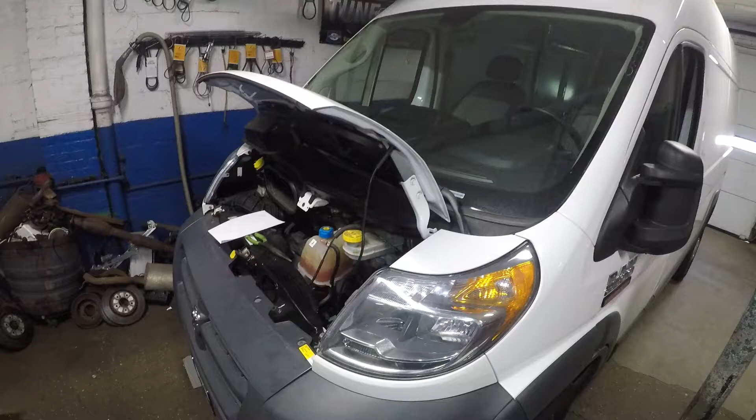What's up, YouTube? I got a 2018 Ram 2500 Promaster. Today we have a problem.

As you can see, I got my key on and no horn.

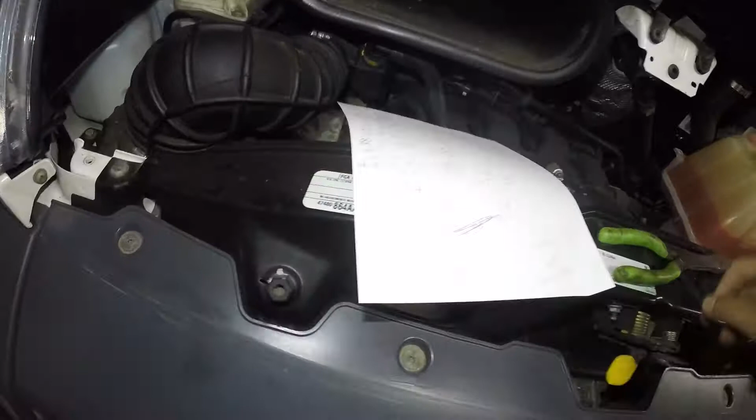So if you guys want to do a little bit of diagnostic, checking your fuse and relay, I am gonna show you. I cannot test the fuses because they close up the ports. I did do a video on the USB and charging port fuse, and those fuses were bad. I do have a video on that, and I have a diagram on a whole bunch of stuff if you need to know which fuse is what.

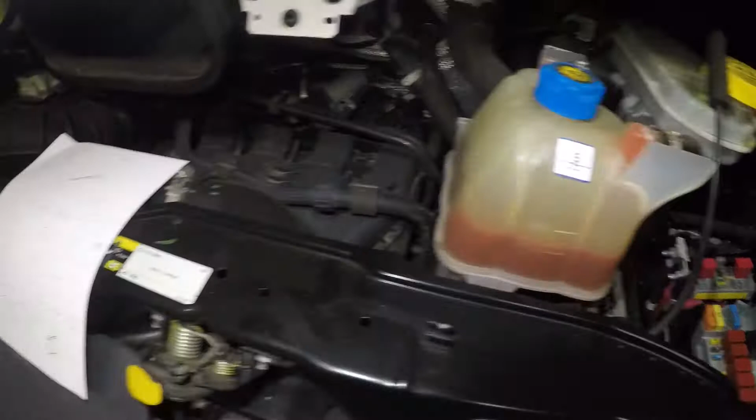Check out my other videos. But you see this right here, this is your horn relay, the one in the middle. There's 5 relays that look the same. Come on, so it's this one right here.

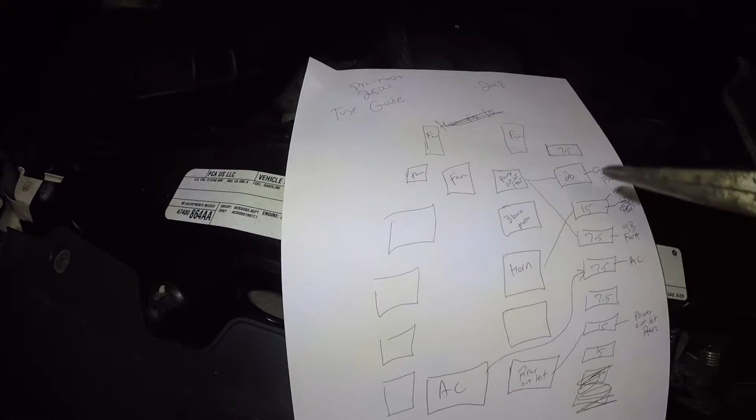So what you're gonna do is take this relay out of there. All you do is grab it with needle nose pliers and it should come out, then you can swap it with another one. These are tough little guys, so let's try a little bit harder. I'm not gonna be able to do it with one hand, but you can swap it with this.

This is the AC relay. You can also swap it with this one right here, this is a power outlet relay. So maybe your AC relay is bad as well.

So swap it, try different ones. You could use this one, this is for a power outlet, but you will be shutting down your power outlet. But the horn fuse, very important.

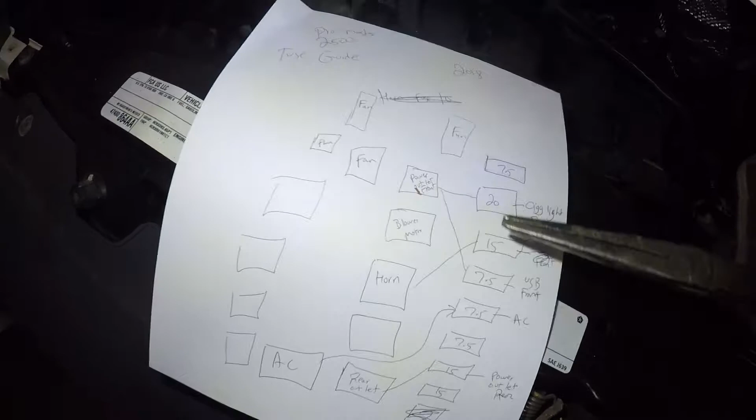1, 2, 3. You see how I connected a line here to here? So it's a 20 amp fuse. The horn fuse is this 15 amp right here.

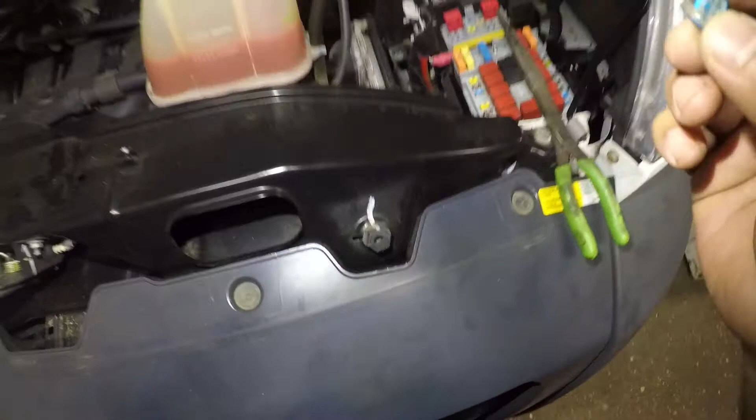Since you can't test it, what you're gonna do is just pull it out and put another fuse in. This car is terrible with the fuses, they just don't want to come out. But this one looks pretty good, the fuse looks good, so I'm not gonna change it.

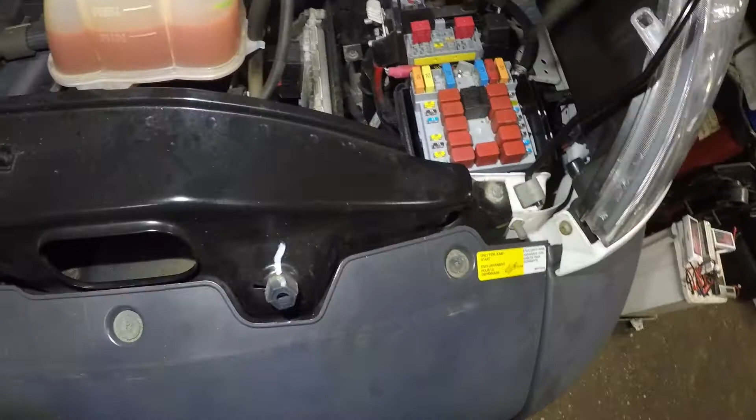It might be blown, it could be the horn itself, it could be a ground, it could be the switch in your steering system, it could be a relay. So try these few things, so now at least you know where the fuse is and where the relay is.

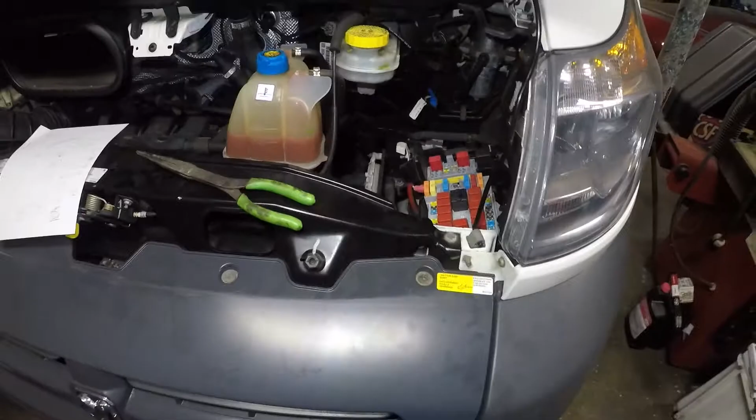But if I discover something else with this car, because I am going to go further, I'm probably going to go deep into the relay, and I'm probably going to hotwire the horn and let's see if it works. Then we'll put a test light here in one of the circuits, see if the signal comes from there to the computer and it gets here. And do check the rest of your fuses and relays just in case.

All right, so the horn doesn't work on this one. This is part 2. I showed you fuses earlier in my videos. This is a 2018 Promaster Ram 2500. So we have an issue, no horn whatsoever.

So here's the relay for the horn right here. This is the horn relay, and let's look at our diagram in the back. This third fuse, 15 amp, this blue one right there, this blue one right here is for the horn. So this and this work together. Let me show you what I discovered so far.

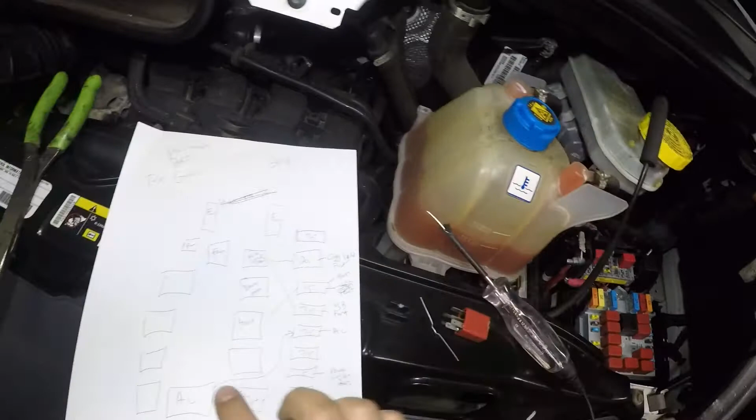So let's pull out this relay. Let's go into our diagram mode here. You see the number 30 right there? My lighting is just crazy bright. So this is the relay.

So pretty much when you press your horn, this thing gives a signal, teen, teen, teen. It goes through some type of module, and then it engages a ground into this relay, because we have a 15 amp fuse, number 10 fuse right there, F10, that's a 15 amp fuse. So that's what we're looking at.

So the fuse comes down, bam, there's power over here, but this relay needs to engage, and this power should be sitting over here. So what I discovered so far was there's a number 30 leg here.

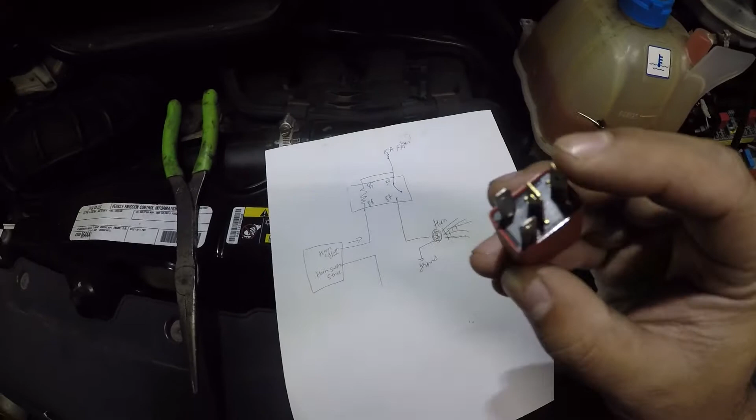This is the one right there. If you look at it, that's the leg that goes right there on the fuse itself, that's that one right there. Let me get my lighting a little bit better on this side. So that's the leg, check this out.

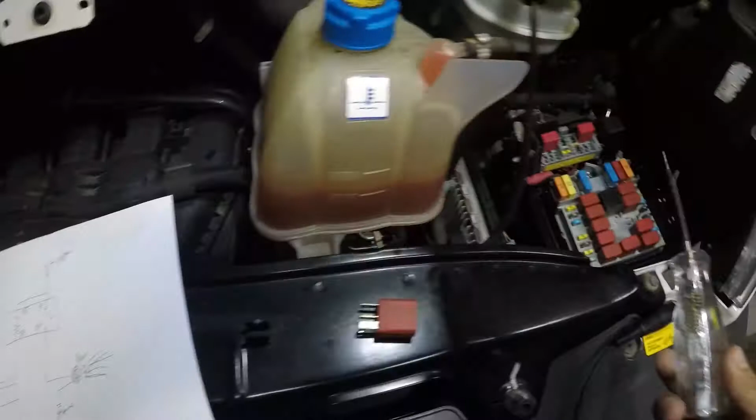I ground this, there should be power sitting over here. There should be power, and we have power. What I did was, let's take this off and let's pull out this fuse just to confirm it. Because this vehicle is crazy on fuses, there's nothing like pretty much actual. You can't even check these fuses because they don't have that tip to check.

But anyways, let's put this back. And then now we don't have power, but if I put this fuse back in, we have power.

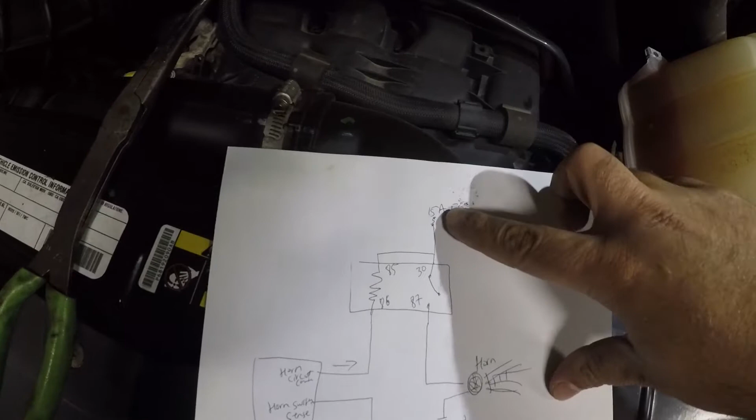All right, so this circuit from here to here is good, but now we need to check 85. Let's see if 85 should have live power right there. 85 is this leg right here. If you look at the relay in that manner, the 85 leg is that one right there, so it'd be the one over here.

Let me show you where I put this guy at, so make sure you get a good view of this. I'm using a pin here, a cotter pin. And we have no power in 85, so there's no power here.

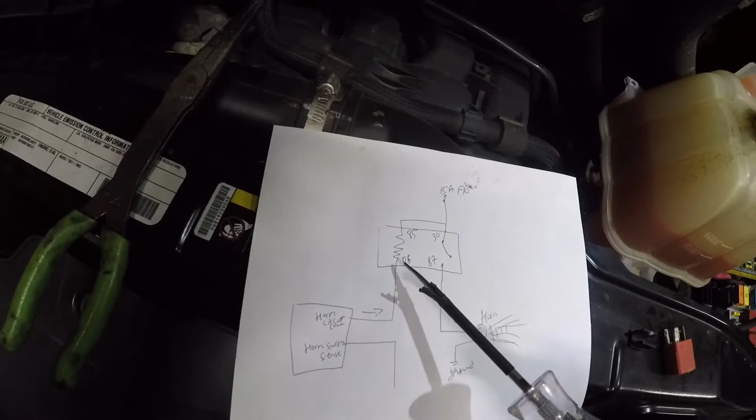But what we're gonna do is, I'm waiting for one of my friends, so once he comes over here, we're gonna check 86. We'll put a test light on it, but we need to invert ground and power because this is ground controlled since we needed power there. And we're gonna check one more thing.

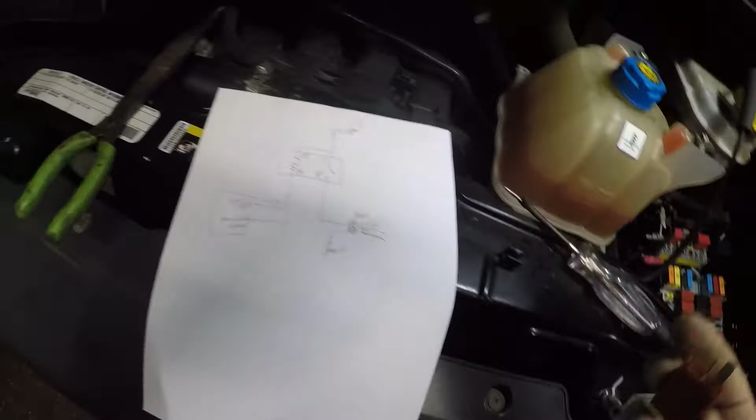87 should have ground because it's gonna backfeed right through the horn. It should backfeed. So let's look for 86. If it backfeeds 86, that means I can jump it and see if the horn just goes meh. So right now we're checking for ground, so we're gonna switch to positive here.

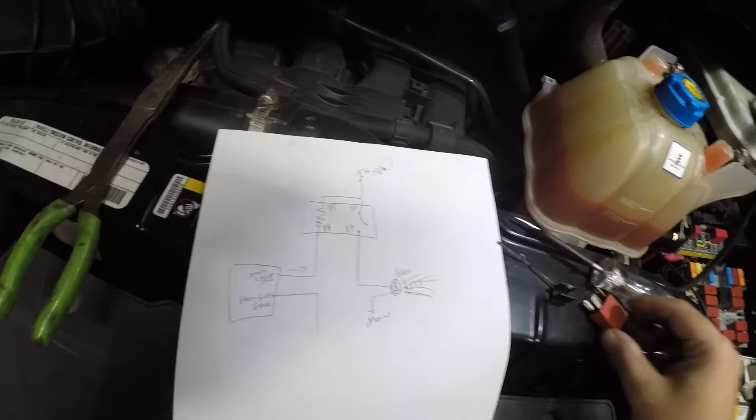Okay, I might be wrong there, but alright, so there's nothing there. Maybe it's not gonna backfeed, or maybe my test light's not connected properly. But 86, let me just make sure I got it.

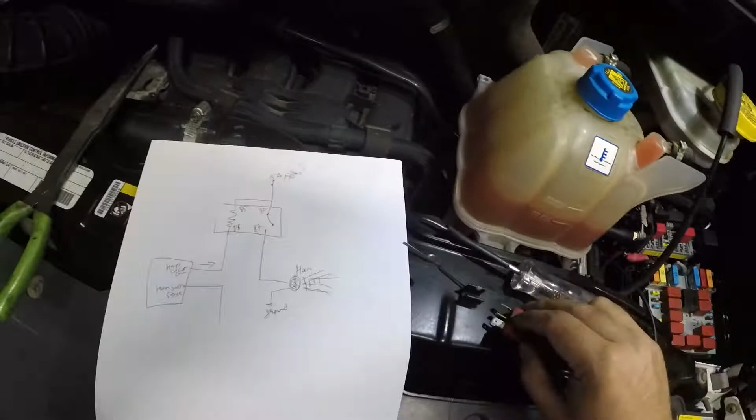I'm sorry, 85. 85 is correct. I don't know if I checked the right one. 85 is the one more closer this way. Let's do it again. I hope I checked the correct one. 85. Oh, it does have a very tiny bit. See that?

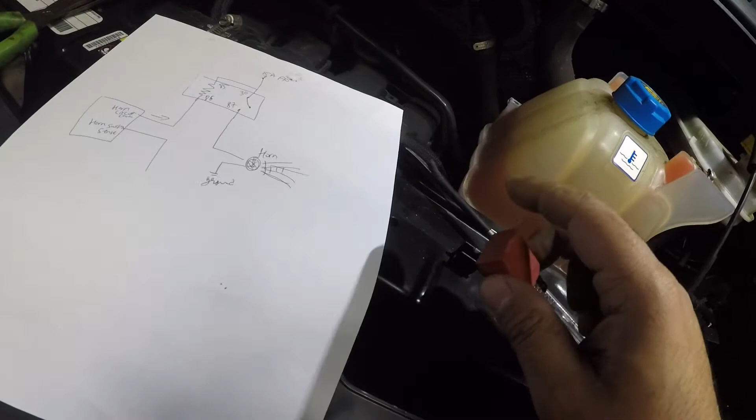Okay, so if I take a wire and jump it from here to there, it should go boom. All right guys, I was wrong there. I'm sorry, 85 should be a power. What was I checking there? 86. 86 is the ground cable.

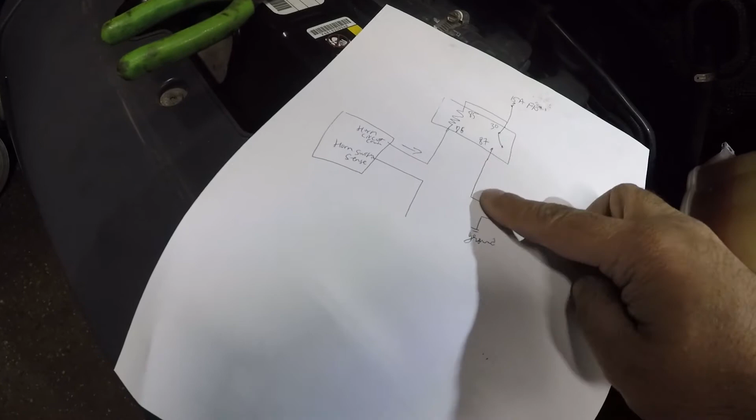So far all I discovered was there was no power here at the 85. And so what I did was I made a mistake. So 87 is the cable that goes to the horn. Let me look at what's in the 87. 87 is this middle leg right here.

So you see I put the pin already in the middle leg right there, and I got me a power. So all this lead is connected to power there. Check this out. There you go. So we figured out, so pretty much our circuit is pretty good.

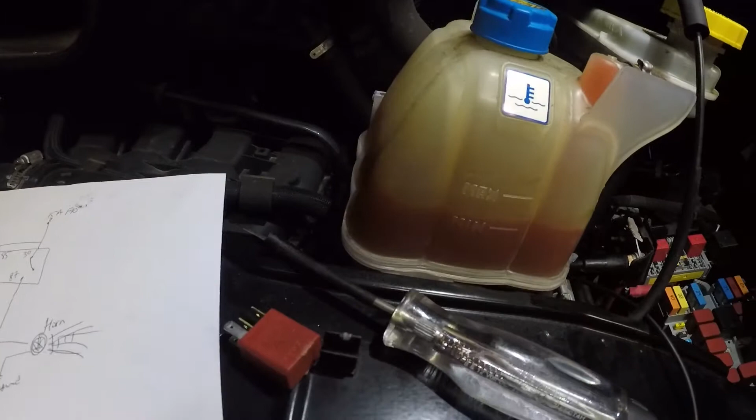Only thing I can't check is, you know what, let's check this 86 because my friend is not here. I'll connect my phone to the camera, and what I'm gonna do is 86. Let's figure out 86 that way, because I need somebody to press the horn while this is going on. But 87, I'm sorry, 86. You can easily mistake things here.

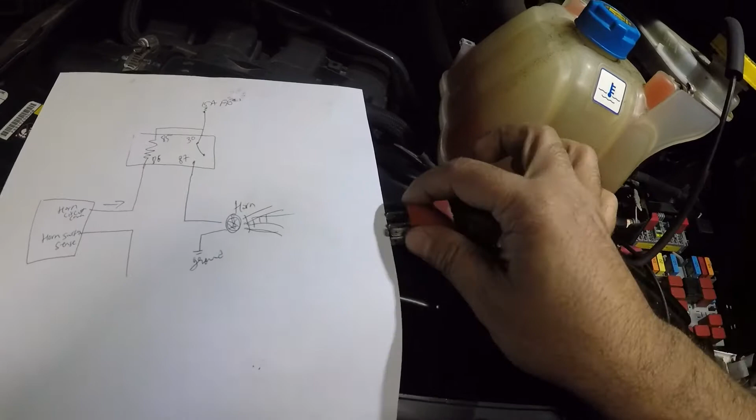86. Okay, at 85, I should have power. Let's check one more time. 85 is this, it's hard to see on this guy. 85 is this leg right here, and that's the one right here. So 85, if I put it that way, it'd be this one.

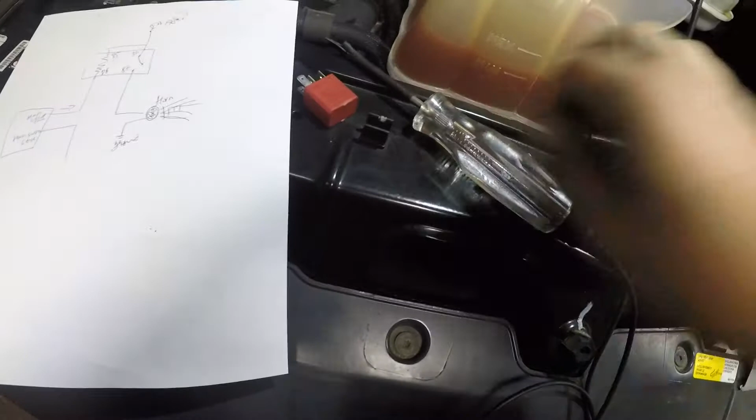Let's just check power one more time. There should be power here all times. All right, so let's switch up this little guy to ground here. Okay, so yeah, definitely we don't have power there. We don't have power there.

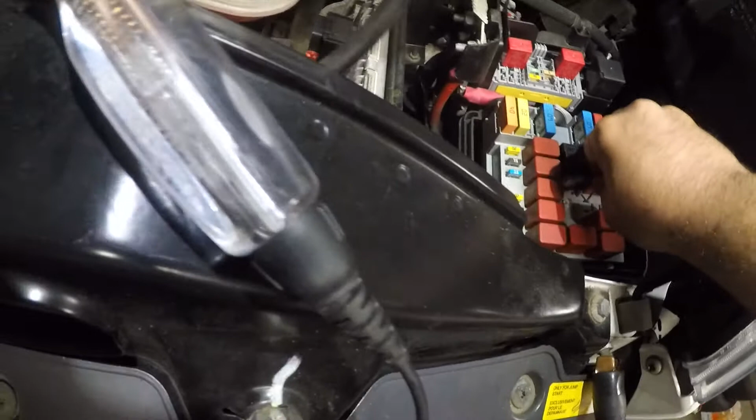But let's check the control, 86. 86 is the opposite one right there. So that's 86, so this is where the signal from the horn comes in. So if this doesn't give me signal, we have a problem with something else.

So what I'm gonna do is I'm gonna try to figure out how I'm gonna put this test light here, and I'll put my camera here, and I'll go inside with my phone and press the horn.

All right guys, so what I did was I put my test light here, and I tried to check if there was a control coming from the horn switch. So we have multiple problems here. First of all, we don't have power in one of the leads on the relay that's gonna give power to the relay. We do have power that's gonna go directly to the horn, but also we don't have a control. So most likely it's gonna need further diagnostic, but we do need to inform the customer.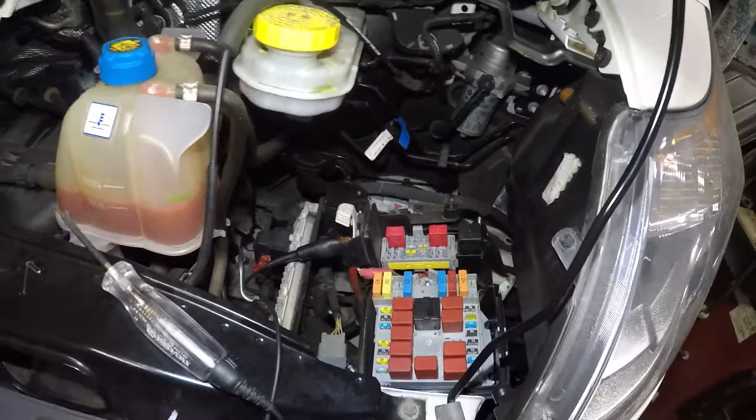Maybe they don't want to go further because we don't want to go bananas checking, because the little guy goes through the body module, the little thing I showed you guys here. Let me pick up my circuit here. So it does go through a body module here.

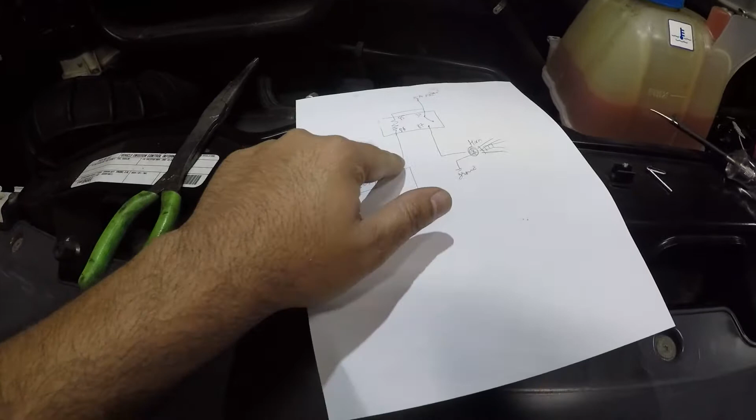Let me put my light up here. This is the body module, so when you press the horn, it goes through the body module. You can check here to see if your switch is good, because when you press the steering horn, if this thing gives out a ground, good, that means your switch is good. Then this needs to have an output, and it could be a broken cable, it could be anything, it could be a bad circuit inside this fuse box itself.

But long story short, we're gonna have to continue this. If the customer agrees, we'll go further and update the customer. Anyways, all right guys, it's a Monday morning.

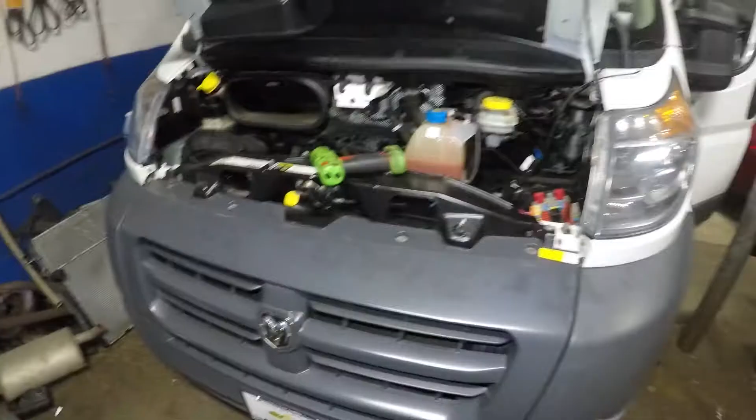This is a friend of mine's 2018 Ram 2500. So as you see how I was working on the horn relay, we jumped the wire to go directly to make the horn come on. And I got my test light connected here. There's a reason why I did that. I'm gonna show you exactly what I did. I got the horn working, but really there was no problem.

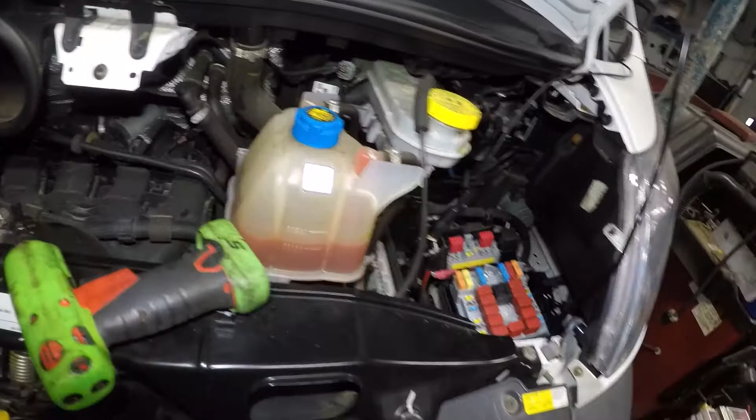I'm sorry, anyways there was really no problem here. The problem was a bad mechanic that worked on this vehicle. So pretty much it cost him an arm and a leg already, and I'm gonna use this little guy on a process that I'm about to show you inside.

So this is the thing I was gonna go check. Customer said he doesn't want to replace a module. If it's a module, he doesn't want to replace a clock spring. If it's a clock spring, this does go through the clock spring, the control of the horn. There's a clock spring, I'm gonna show you where the clock spring is.

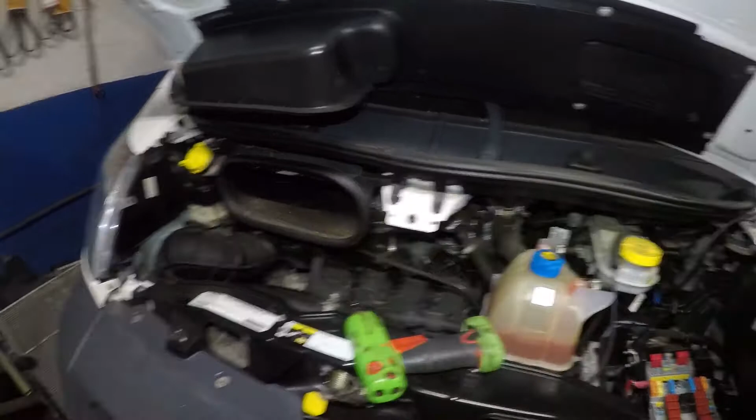But it could have been the body module, because remember the circuit goes through the body module and it controls the ground from there. So the horn switch shoots through the circuit to the body module, straight to the relay. It grounds the relay, and there's a power wire waiting there that becomes magnetized, and the relay clicks, and bam, that's what it does when we jump there. It gives the power to that cable for the horn to come on.

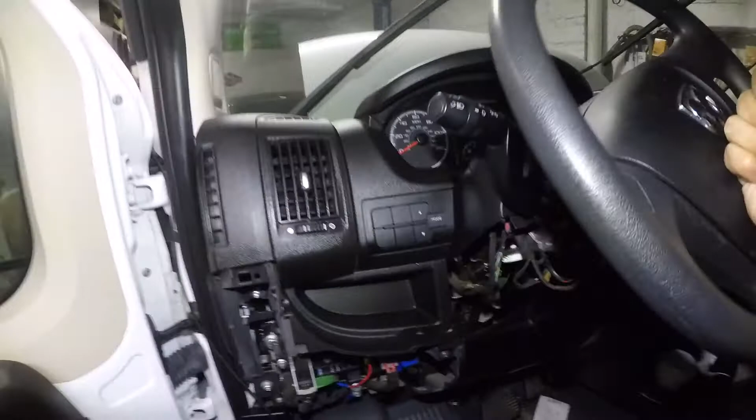But let's go back inside here. I got the Big Kahuna open over here. All right, there you go, the Big Kahuna, the horn. Okay, it's not working because I undid the job that I did.

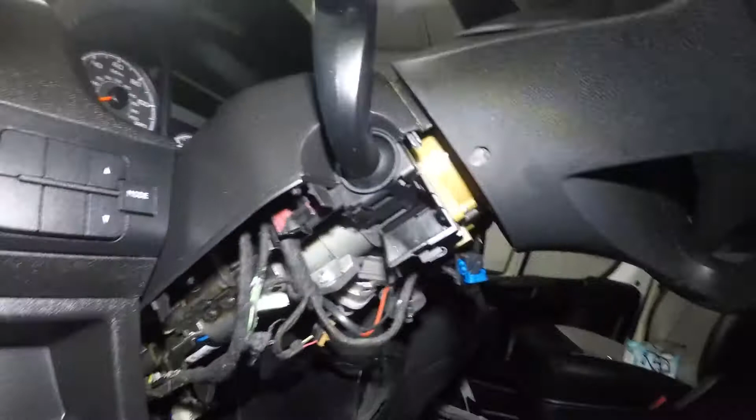So what I did was I was gonna pop this airbag open to see if there's a cable ground in here. That ground can break. But to pop this airbag, you need to take off this cover, and you simply just slightly pop it, but I didn't get to that point because I discovered something.

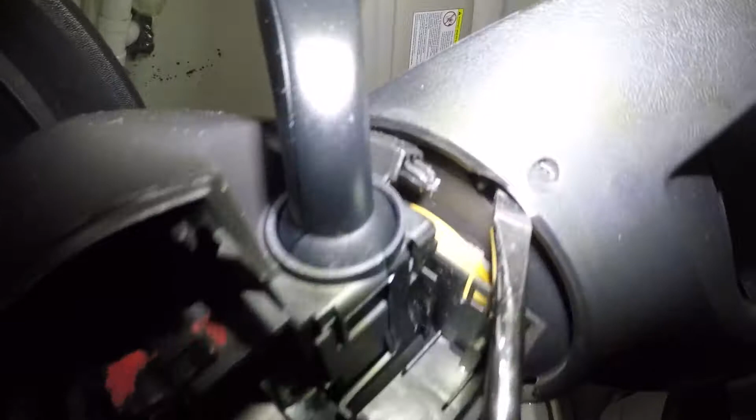You probably noticed it as we were working on it. So there's 3 of these little retainers in here. So you just pop this. There's one back over here, you can turn the steering. There's one on the opposite side here. So it's 3 of them, and the airbag comes off.

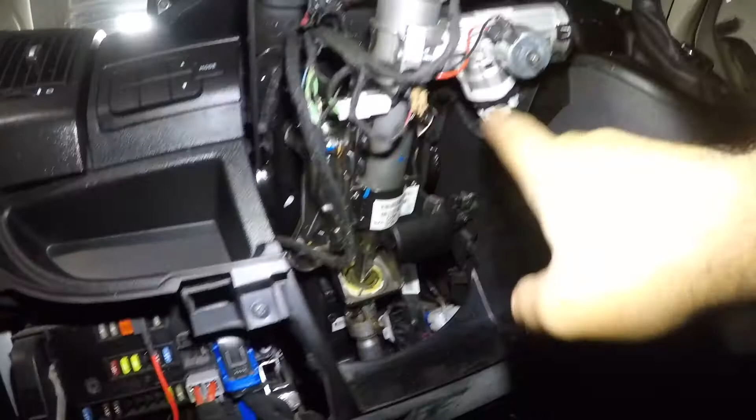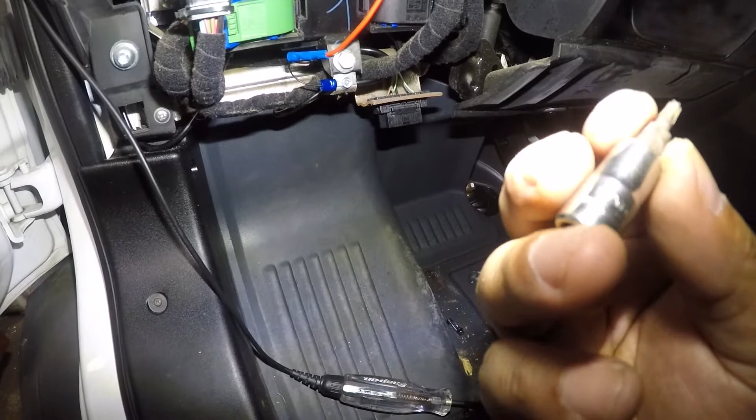Also remove this cover over here, and this cover has a screw here, a screw there, and a screw here, and the whole cover comes off. It clicks in here and probably down there somewhere. So this cover comes off. Also took off the fuse box cover right there before that, but you could just take that along with it.

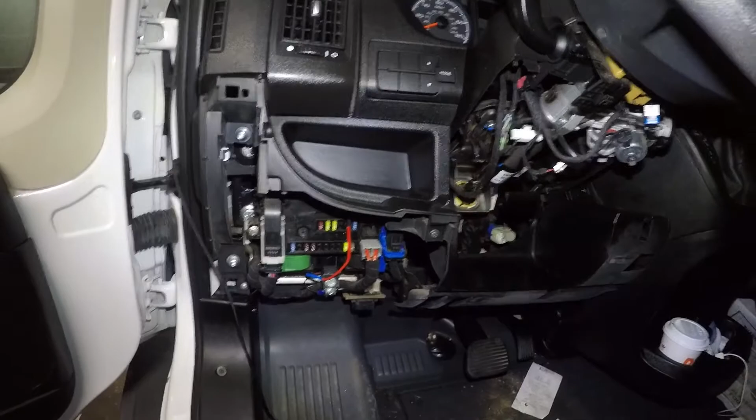But anyways, what I discovered down here was a whole bunch of connectors. I was gonna back probe the wires. I was gonna find the horn cable over here and trace it down from here. Instead of me opening the airbag, I was gonna just test it from here, see if it gives a signal. But I found a whole bunch of connectors. I don't even know if this goes anywhere or if this is some accessory stuff, but I'm not really worried about it. That's not part of my job.

But look at this clock spring here. This is the clock spring, all right, the wiring goes through it. It was disconnected, check this out. So all I did was plug this back in, and you see the problem. All right, so this was the problem here. Check this out.

Hey, get out of my way. Woo! Anyways, put everything back together.

Make sure your harness does not come out. I don't know if this came out, but this was clicking earlier, I think I snapped something on this. I'm gonna have to work some magic here to get this thing to sit properly in its place. But that was the issue right there.

It takes time to figure out a problem like this. You gotta put your mind to it.